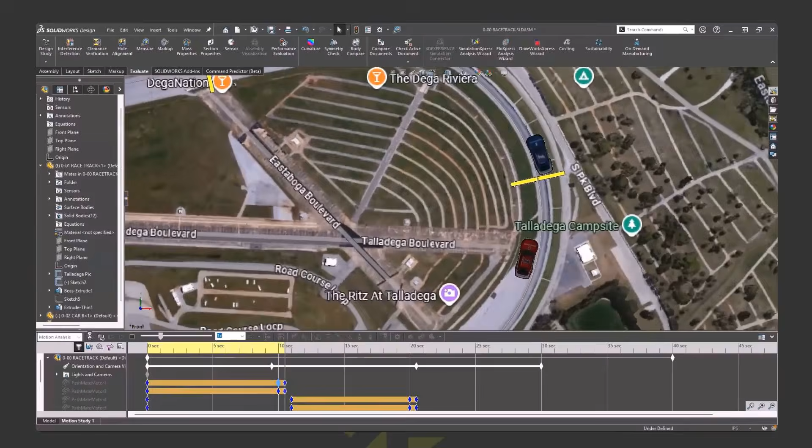So here's the little setup. We have, of course, SolidWorks. We're using Motion, and you do have to have SolidWorks Premium for the motion analysis part of this. What we did is we just ran two cars, and depending on what the results were set to, that will depend on whether the path motor is actually going to make the car go faster or slower.

All right, so in the agenda, we have different heats, six different heats. And each heat, I'll do a demo, Dave will do a demo, or vice versa. And then, of course, whoever voted for the most will decide who wins.

So on to heat 1. I'm going to start off with speed matters, and then David's going to go with speed matters with the fill pattern.

So, of course, you got to start off with a SolidWorks demo with a simple block. I'm going to go into the sketch, and in the sketch we're just going to do a pattern here. We'll select the entities, do a 19 by 5, give it some dimensions, and hit OK. Simple linear pattern in a sketch. We're just going to do a cut extrude through all. Hit OK, and we've got our pattern.

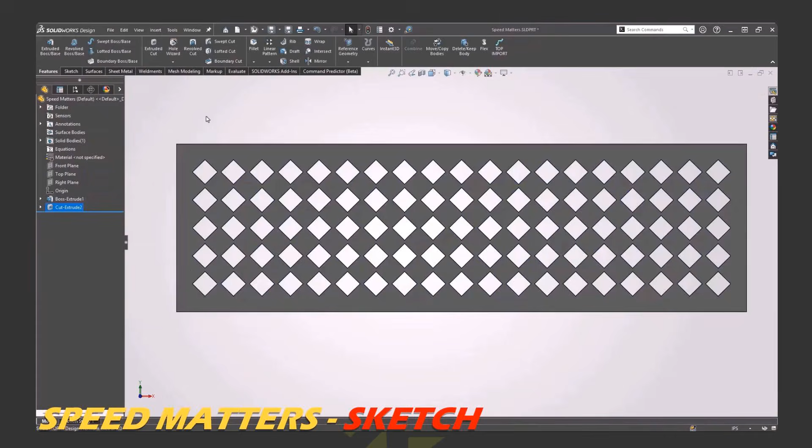So how do we find out how fast that actually is? We're going to go to the Evaluate tab, do Performance Evaluation, and we'll look at the total rebuild time. Right now we're here at 0.58.

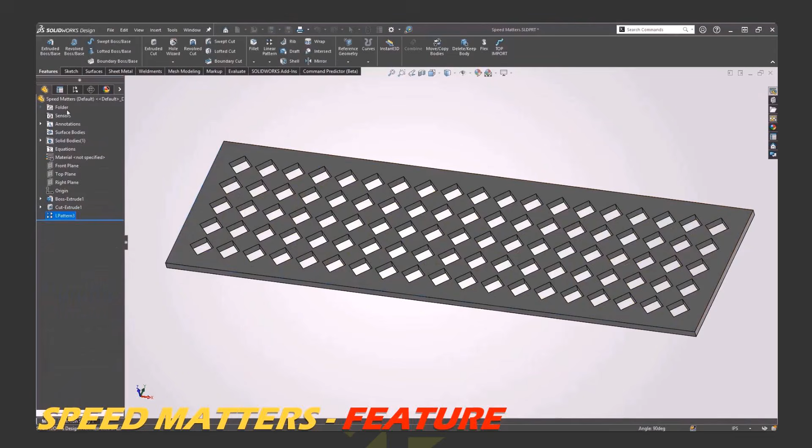All right, then we're going to do the exact same thing, just a little bit different way. I've got the cut as a feature, and then we're going to do this as a linear pattern. Again, we'll go to Performance Evaluation, and notice the rebuild time is 0.06. So our results: sketch linear pattern is 0.58 seconds, feature linear pattern is 0.06.

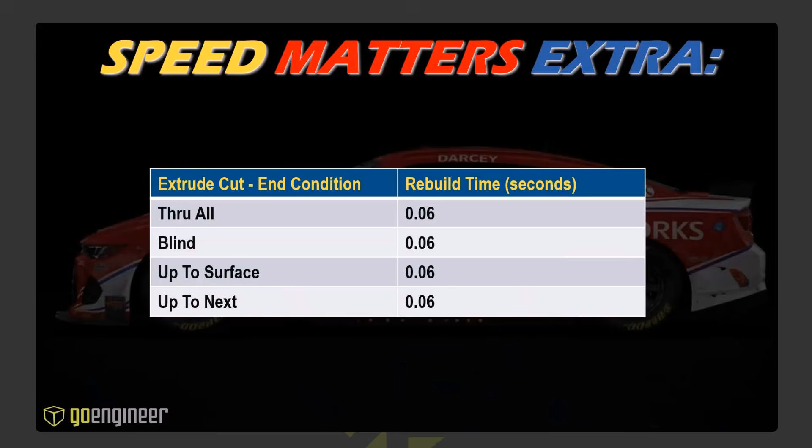So if you're going to do it, do feature linear pattern. It's much faster. So then I went down a little rabbit hole on whether blind, up to surface, up to next, or through all is faster. I wanted to just find out what's best. So we took a look at the evaluation results, and they all came out 0.06. So for the most part, it doesn't matter which way you do that. Pretty cool, but it's good to know.

All right, so then we decided to do something a little bit even harder. We're doing a circular pattern in this, and I'm going to do it in two different methods. Initially, I'm just going to do a cut extrude, and the cut is going to go up to surface. There's a little surface back underneath there.

And I do two different cuts, and then after the cut, I'm doing a circular pattern. So you can see it actually takes a little bit more time to do it. And if we go to performance evaluation, I did speed that up. It did take about 18 seconds for it to complete.

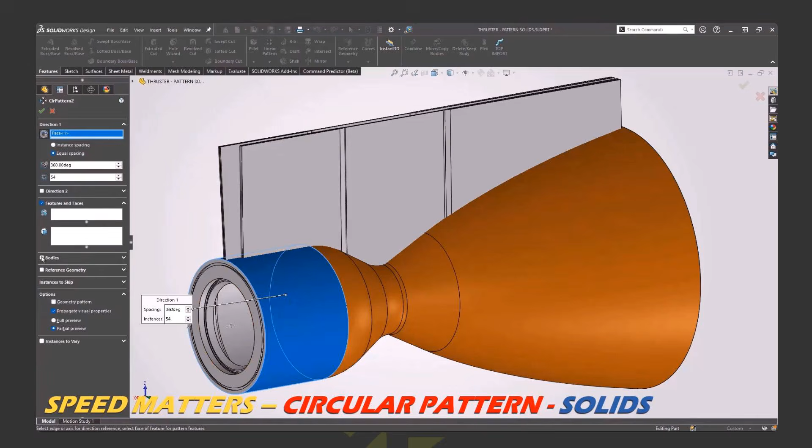So then we're going to do this a little bit different. Instead of doing a cut extrude, I'm extruding these solid bodies up to surface. So I've got my two solid bodies. And then again, doing a circular pattern, but in this case, doing circular pattern with the bodies. And I hit OK. And that circular pattern goes fast.

No resulting geometry to do, so it fills in just fine. All right, then we got to do a combine to cut and remove that material. And there we go. And then evaluate, performance evaluation. And you see this took 13.8 seconds.

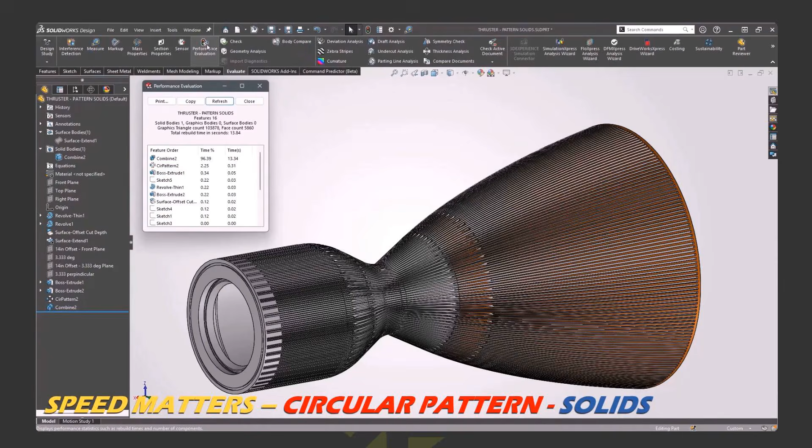So when we put them side by side, if I do a circular pattern, it's 18 seconds. If I do it with the solids, then it's 13.8. So it is faster typically. And in older releases, it's way more faster to do a solid pattern and then do a subtract.

All right, so fast parts equals fast assemblies. Feature patterns are typically faster than sketch patterns, and pattern bodies can be faster than patterning features. That's fast. Nice, right, Darcy.

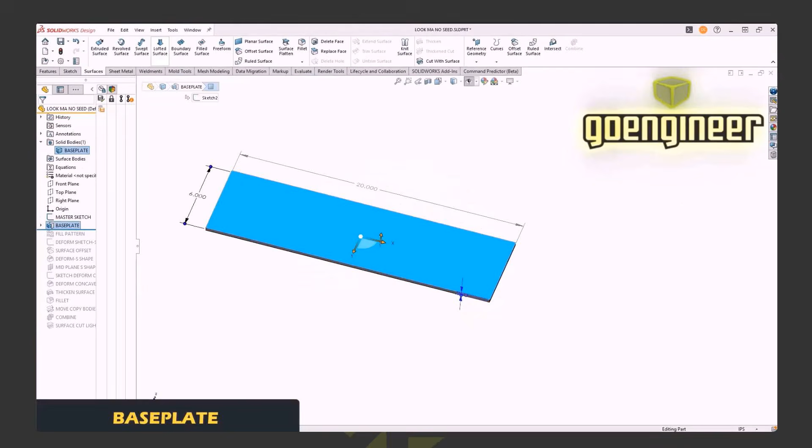There you go. All right, so what I'm going to show here is what we call a no seed pattern, and this turned into a light. So I wanted to start with the same size plate that Darcy had, and that's going to be sketch number 1. So keep that in the back pocket.

So I'm going to do a fill pattern. And when I do a fill pattern, notice over here on the left side, I've got all the properties. And all I've done so far is just select the boundary that I want to put the pattern. And what I'm going to do is I'm going to select my horizontal, my vertical spacing. I'm going to select an edge to start the pattern down. And I'm going to hit this button that's over on the left.

It's called Create Seed Cut. Now, when I do this, if you haven't used this before, it's pretty cool. I can pick 3 or 4 different shapes, and I can control it, especially if I have like a pentagon or octagon. I just set it. But let's match up to Darcy here. So 0.625, right? Looks exactly like Darcy's.

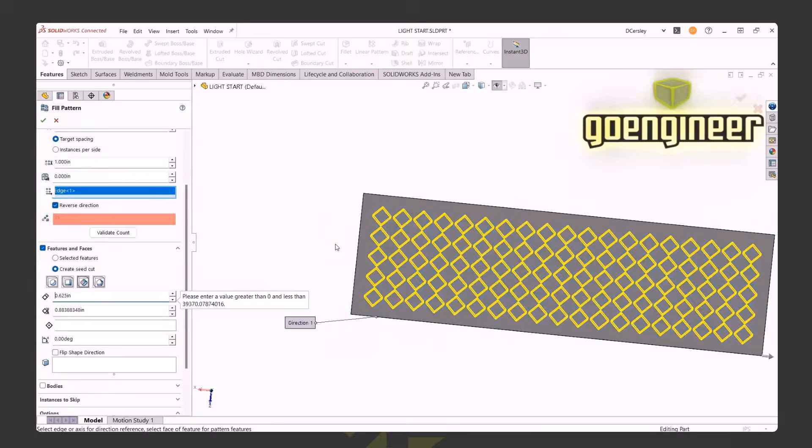So I say, OK, execute it, the command, D to confirm, and I go to performance evaluation. I can see that right now, Darcy was what? You were what? 0.06. 0.06, and I'm 0.17. So Darcy's a little faster.

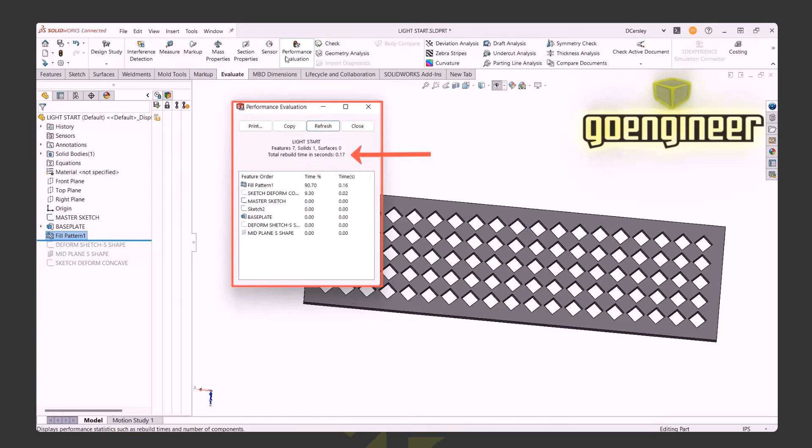But let's take a look and think about what happens not only when we make parts, but we have to edit parts. And that's where this may become a huge advantage for you. So let's take a look.

So speed matters, just like a NASCAR pit stop, right? So what if I come in here and I have to change that from a diamond to the hole? Look how quick I changed that. All I did was change the seed cut there in the fill pattern. Now, if I want to change it back, I can, okay?

Now, what about instances to skip? So when SolidWorks looked at this plate, it looked at the boundary and it created this pattern. I can turn all those instances off, whether I manually select them or I do a shift select. And if I had to do a hard chamfer here on this plate with a seed cut there, I'd be in agony city.

So here, I'm just going to do a right-click, clear, performance evaluation. And with a circle, notice my time is down to 0.08. So that made it a little bit faster.

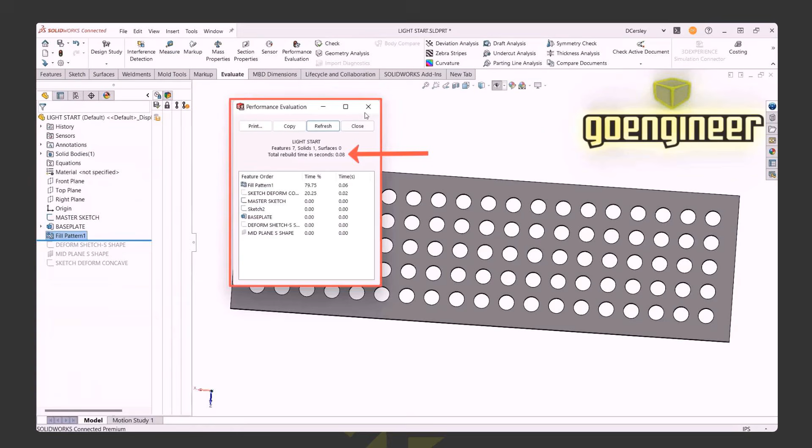And again, I'm a little bit faster here just for the ability to change things. So sometimes maybe you want to be a little slower, but go faster on change. Because unfortunately, we do have change.

So I got the plate, and this is where I kind of made a mistake, but I'm going to show you the deform tool, and we'll talk about why that was a mistake later. So I've got my second sketch here. So keep that in mind. So that was our second sketch. I'm going to do the deform tool.

But to do that, I'm going to create a copied surface. I'm going to offset 0. Okay? I'm going to come back. I'm going to hide the original body. And now I want to deform this surface.

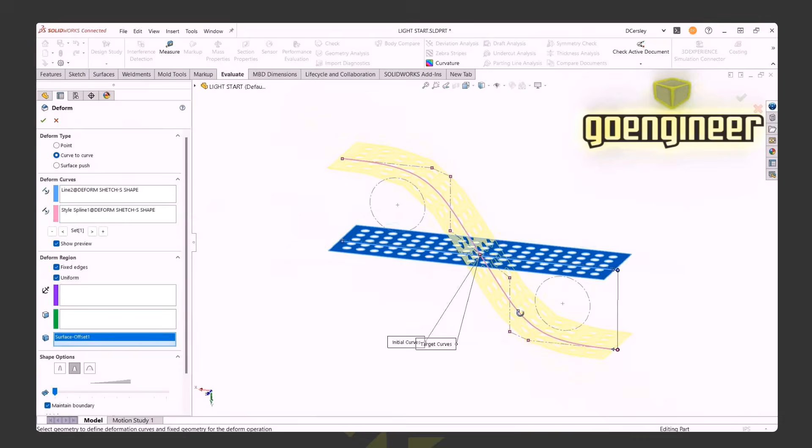So I'll hit the deform tool and use this line segment here and this one here to apply the curvature. I'm going to say uniform, then go pick my surface, and you can see the yellow preview. I was quickly able to keep the pattern. The holes look good, pretty happy here.

I'm going to deform it one more time, and this will be the third sketch we use to create this part. So I deformed it one more time with a third sketch. Pretty good. I'll turn off my sketches, and this part looks pretty good.

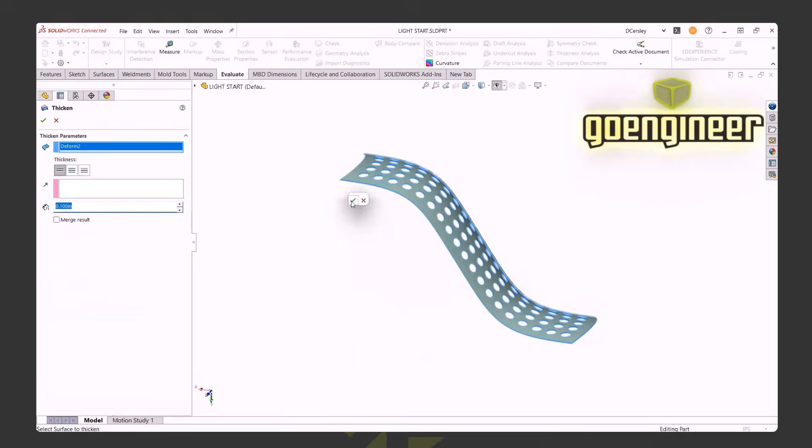Now to turn it into a solid body, all I had to do was use the surface thicken tool. So now I quickly went from just a surface into a thickened part. So I got this thing up.

Looks good. Okay, so here's where we run into a change. I wanted to change the shape back to the diamond, right? So watch what happens here. I just simply changed it, and oh man, like Cal Naughton Jr. said, or Ricky Bobby, help me Oprah Winfrey. So I had to make a quick change.

So I'm going to pick on the face. When I go back to the original body and pick that face, guess what? It's now updated not only the original body, but the curved body we deformed earlier. So I'm moving pretty fast here.

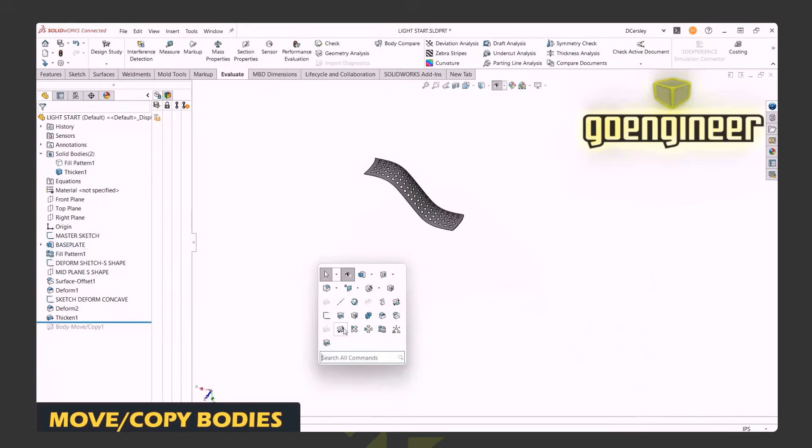So now what I want to do is one more type of pattern to complete this light. So there's my part, and I'm going to do a move copy body to create the pattern. I'm going to say 7 instances, and when I picked on rotate, something interesting happened. I said 45 degrees, 7 instances.

I had to go back and recheck the copy box. When I do, there's my cup. Looks like something out of Game of Thrones, right? But here, all I'm going to do now is do a cut with surface. I'm going to cut half of it away, and there's my light.

So when we talk about going fast, we used our fill pattern. The other thing is we didn't spend a lot of time on sketches—there were 3 sketches to create this part. Some of the benefits to you here are I didn't have to use sketches when I did this fill pattern. I put a little asterisk there because we're going to show you a way, if you have a custom profile, how to use that later, okay?

And I can quickly change the pattern. Now, the mistake I made on mine was I did the offset surface and then deformed it and then thickened it. I could have just deformed the body—that would have been the better way to do it. And I have full instance visibility for adjustments. So those are the benefits for you there.

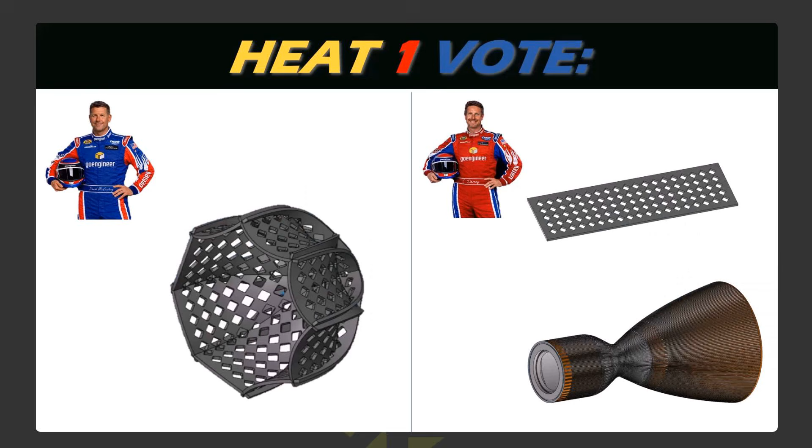All right, so then at 3D Experience World, we did a Heat 1 vote. And here was the results from that first one vote.

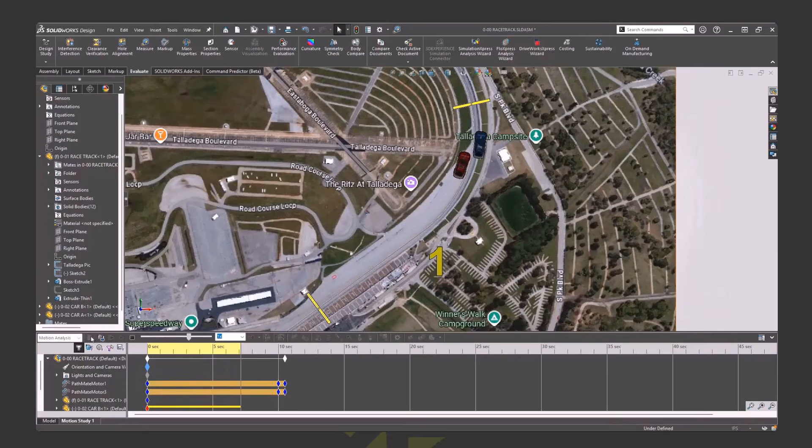All right, so what we have to do is just edit that pathmate motor. So we'll put the dimensions in, and then we're just going to hit the little calculate button. Let's pan in just a little bit. Let me reset that replace key. There we go. Now we hit calculate, and it looks like blue wins. Woohoo! All right, moving on.

All right, let's move on to heat number 2. Darcy and Dave—curve driven, sketch driven—and then Dave's going to do composite curve.

So on curve driven, there's a cool offset option on the surface. So I'm just going to use that tool, and you can see it makes that whole curve there on the surface. But I need to position my hole.

So I'm just going to go ahead and draw in a line in that 3D sketch, make that construction. Then we'll go right into Hole Wizard. The sneaky part about this is I'm just using a 3D sketch and position that on the surface first and then move it to where the location is. That way it'll always stay normal to that surface.

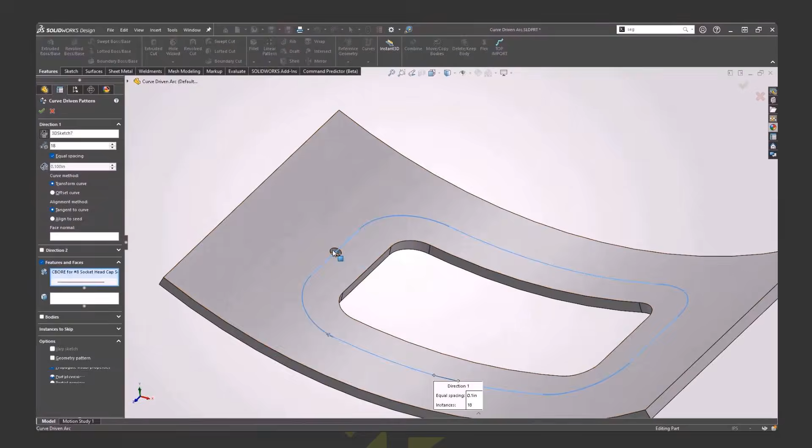So then we're going to go into curve driven. We'll just select on the 3D sketch—we can make more or less in there. Looks cool. Then make sure you do the face normal and select on the face, that way all the hole locations are going to be normal to that face. Turn off our 3D sketch. Then we'll go into kind of a section view mode so we can actually see that all the holes are normal, and that looks pretty cool.

Another one of my favorites is a sketch-driven pattern. I like this because it's very simple. We just put some points out there in a 2D sketch, then go right into the pattern. We'll do sketch-driven pattern, using that same sketch with those 3 holes. We'll pick on the boss and that hole, hit OK, and there we've got them done.

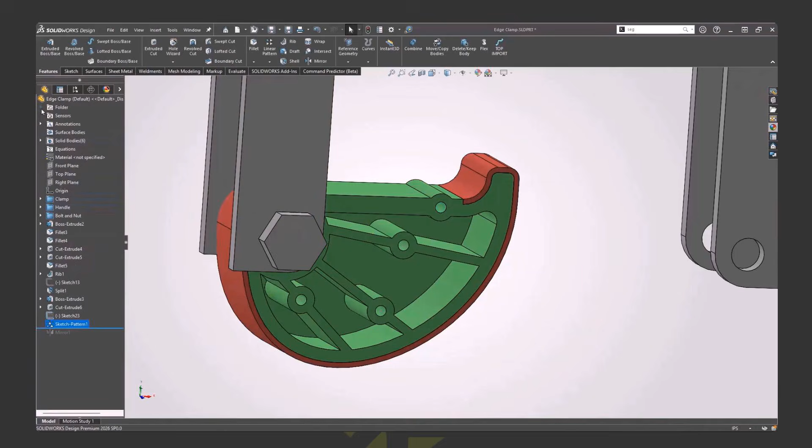So this part goes out to you woodworking peeps out there. That's a little wood clamp. It's kind of cool.

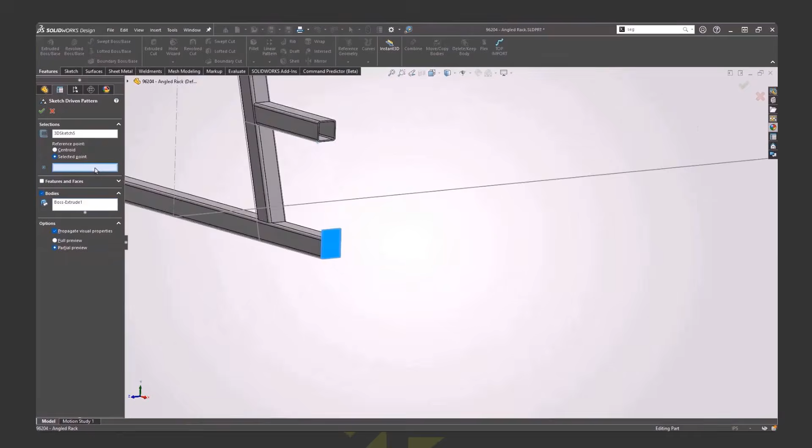Something else I found out is that the sketch-driven pattern doesn't have to be a 2D sketch. So I'm going to start a 3D sketch, and in here I'm just going to select on 3 points. They can be in different X, Y, and Z locations. Then after I have that sketch with the points, we can do sketch-driven pattern again, using that 3D sketch. In this case, I'm going to pattern bodies. The only sneaky thing is you usually have to select the reference point you want to go about. So now you can see all those little plates are in there.

Looks good. Then we just do a simple pattern to finish off one side, and of course mirror it to the back side, and we're done. So pretty quick, fast ways to create your patterns.

That is neat, cool. So what are the benefits? You can pattern normal to curved surfaces, easily copy from point locations, and you can also utilize a 3D sketch for your point locations on the sketch-driven pattern.

I'm going to show you guys this one, called curve-driven pattern. We're going to focus on creating the green piece, and I've got a multi-body part here. This was a jewelry box I made for my daughter, who said, Dad, I need a jewelry box. I thought, oh, this will be easy, but then I ran into problems and thought, ah, crap, let's see how this worked. So I'm going to show you both the errors and how I fixed it.

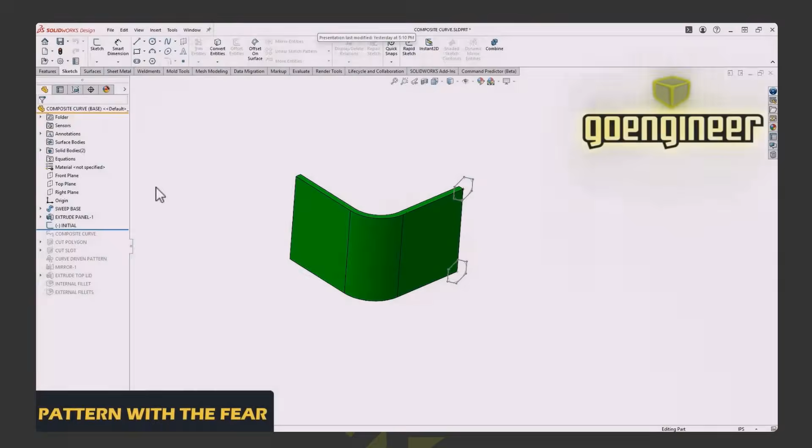I started out with that middle body and just did a cut. Key point here: make sure you do through all. Because it's a multi-body, I just selected the body I had open. So you do not want to do up to surface — that will not work when we try to go around the corner.

So I thought, well, I'll just do curve-driven pattern. I'll go pick that feature I just did, the cut, hit the green check, and guess what — it didn't work. It only went around part of the way because it only used that one line segment.

All right, so option 1 failed. Let's try option 2. I thought, well, I'll do what Darcy just did — I'll make a 3D sketch. I came in here, did a sketch, picked those 3 line edges right there, converted them, and I was like, I'm off to the races. This will be great, this will be easy.

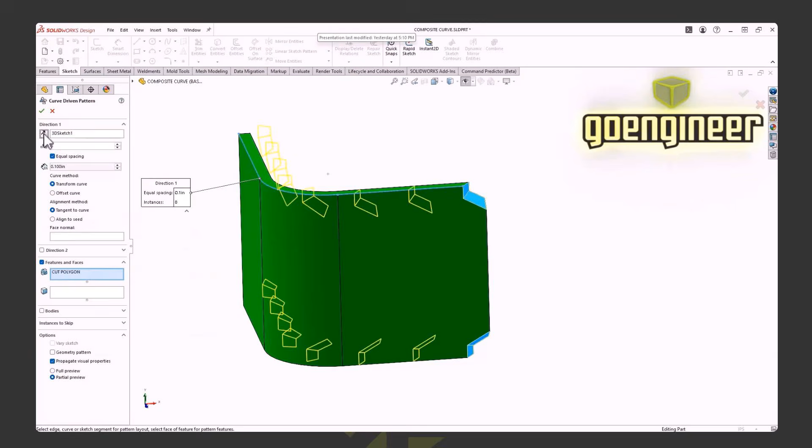A neat little trick: if I hold both the cut and the 3D sketch down when I pick on curve-driven pattern, everything is populated correctly. But look what happened again — we got a serious problem, it didn't follow that path. I tried clicking on every button over there to try and make it work. Like most of us, we just click on buttons, and sometimes it works, sometimes it doesn't. In this case, it didn't.

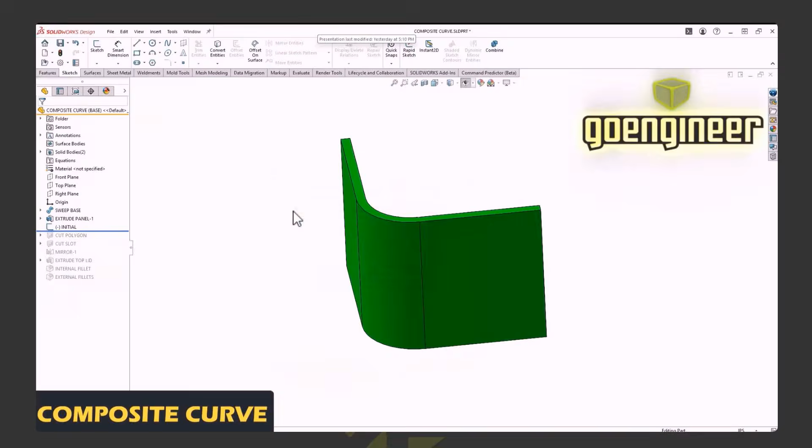So what would work? What I did here was try a composite curve. I used a composite curve and grabbed those same 3 line segments I did with the 3D sketch, but guess what — the composite curve is going to look at it now as one single line segment.

So when I do my curve-driven pattern, I'll go up, grab my composite curve — notice it went all the way around the corner this time. I can set the direction arrow right there. Cool, looks good. I'll go grab my cut polygon and hit the green check, and guess what — it patterned all the way around the corner.

So now all I had to do was add another cut. I went over to the feature tree, reorganized it, added an additional cut, and had to add that back to my original pattern.

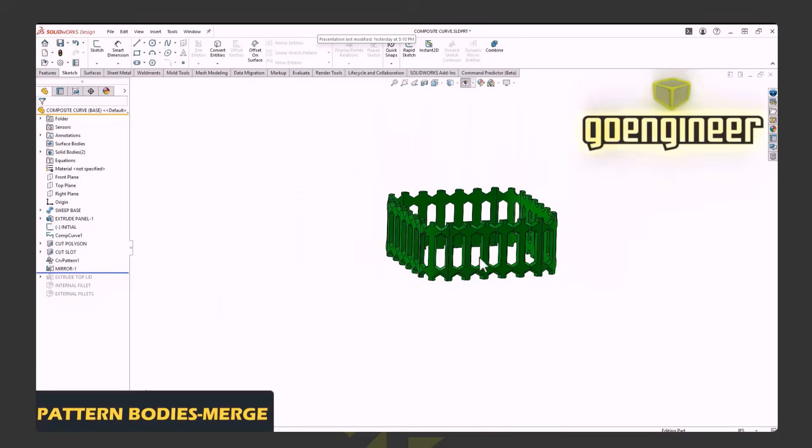And guess what? There's that body. Now to make this square part, all I did was a mirror, and I checked the merge entities box. So once I did that, all I had to do was come back in here and add a few fillets.

I started out trying one thing, that didn't work. Tried a 3D sketch, that didn't work either. And it was the composite curve that allowed me to make that go around the corner.

So some of the features and benefits to you, the end user, is I can get a pattern to go around a corner, which is really cool, and it's symmetrical. It's great if I'm doing multi-body part modeling, like this little jewelry box, and it made it easy when I went ahead and 3D printed the part. So pretty good, hope you guys saw something there.

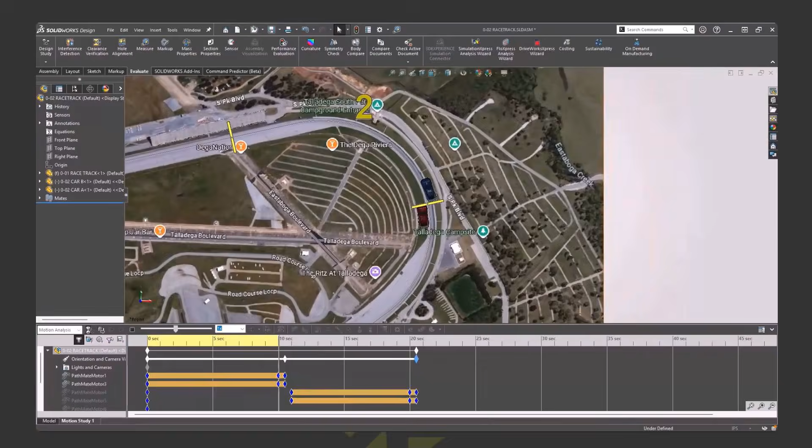So here's where we did the second round of voting. It was Darcy versus Dave, and everybody blew on the kazoos, and Darcy went ahead and updated the race information. We'll make our little changes here, add this for heat number 2, reassign where the orientation is, and calculate. So there we go. Dave started winning at the beginning, and we pretty much tied, so I caught back up on heat number 2. Well, it's going to be a tight race today. I feel the need for speed.

In this one, I'm going to show you guys how to vary your pattern using the sketch, okay? And then Darcy's going to get into variable pattern as well. So let's take a look.

So this is a part here Darcy gave me. I think a coworker had done it, but let me back you into what I did here. I made a solid body with some lofts, cut it in half, did an offset surface, and I'm going to use that surface to extrude up to.

I then did a sketch on the midplane and projected it. I did a split line, so now I've got 2 regions. I want to create a cavity from that first region, so I did a surface cut. Then when I cut it, I went ahead and filleted the corners. So that's all I did to create that cavity.

Now here, all I'm doing is an offset sketch, and I'm going to offset it 1 millimeter, all right? So real quick, real easy. Here's the key for us.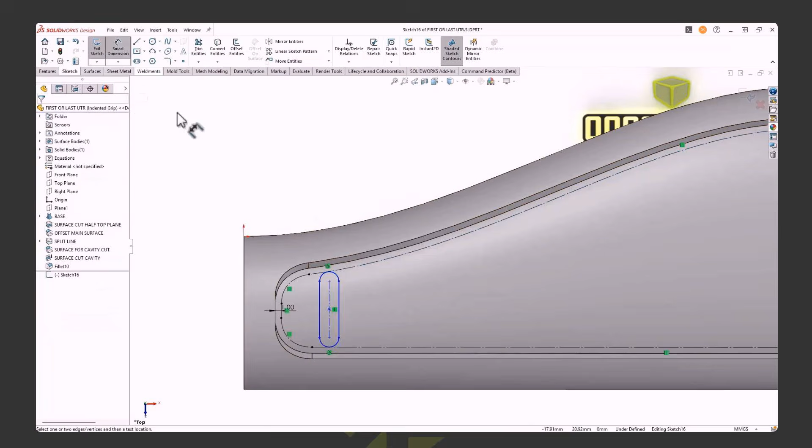I'm going to go ahead and put this little slot in here. The tangent relationships are what's going to be key to us here. I'm also going to set this dimension here to 8, and I'm going to use this to set the direction. Now I need to fully define this guy, so I'm going to go ahead and put a radius on it. And notice that I've got a fully defined sketch, okay?

And what I want is this slot to go, in this case, left to right and follow the orientation of that offset sketch. In order to do that, I needed that tangent relationship in there. So let's see how that's going to work for you.

The first thing I had to do was create a solid feature in order to pattern. So I just did a feature and said extrude up to surface, in that original surface. So again, my grip is maintaining the shape of the original body.

So I'm going to do a linear pattern. I'm going to pick on that 8, and that's going to set the direction. On the left side, under options, check vary sketch, and that's the key here.

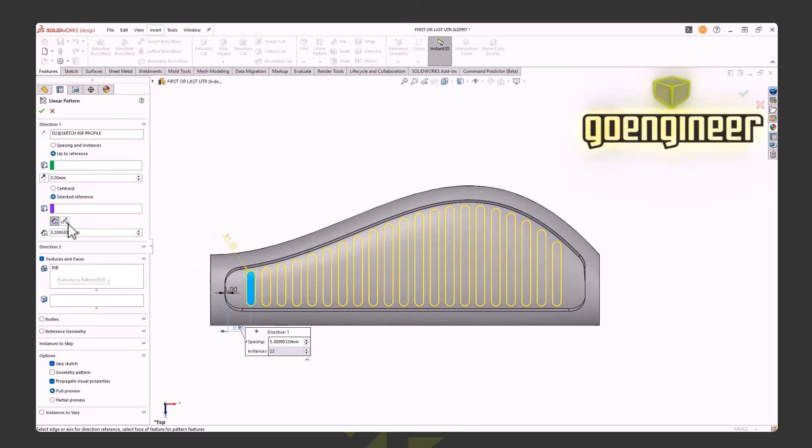I'm going to come up, set the number of instances, and do an up to vertex. I'm going to pick the vertex on the far end of my cavity, and say I want to stay off of that by 3 millimeters. And where am I going to pick this other little vertex? So I'm going to pick this other vertex. It's going to say from here to there, right? And I'm setting everything up.

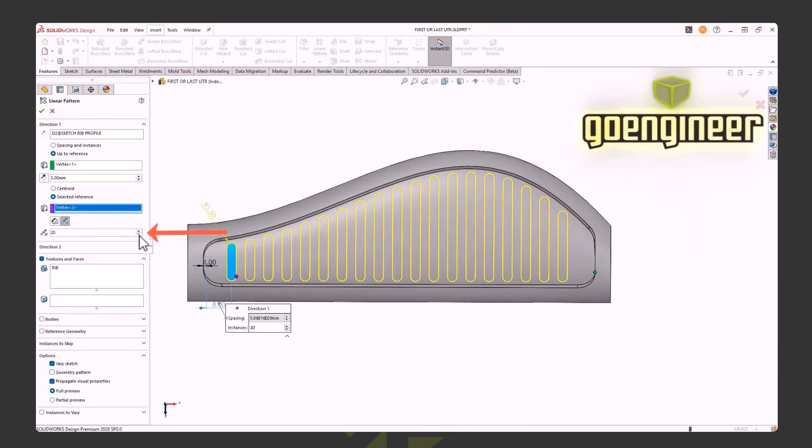Now, by doing instances like this, I can go up or down, and I can just quickly control the number of grips. This is great because I can set these, and overnight I can print 3 or 4 versions, right? So to finish this off, all I did was a cut through the middle. I filleted the ends of it, and it's all set to go.

The nice part about this is if I wanted to make 5 or 6 or 7 configurations, I could go home while the printers are running, and the next day come in and have folks test out this grip to see which one's the right fit. So hope that helps you.

The advantages and benefits here is this: I can update the patterns without editing multiple features, and that's where we're going fast. The more features you have to edit, the more likely you are to make mistakes, and you're also likely to end up with a bunch of ketchup and mustard in your feature tree. We don't want that. So this keeps your patterns up to date, reducing those rebuild errors.

I'm going to show you something kind of cool that I didn't know. Notice that when you do just a linear pattern, you can actually use lines, axes, dimensions, and cylindrical faces to set the orientation. So this is just a quick tip. I'm doing a linear pattern, but I can select the cylindrical face, and it's using the axis of the cylindrical face for the direction. I just put 5 of those in there real quick, just for the heck of it.

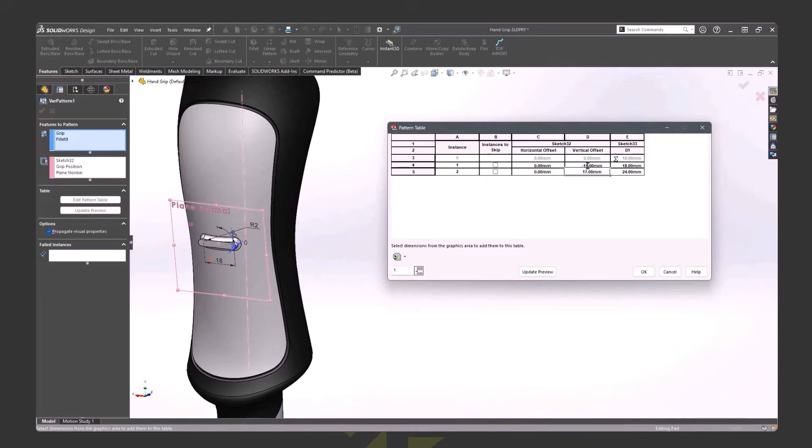Now let's get into the vary pattern. I've got 2 features sitting in there right now. The variable pattern basically uses a table. I'm going to add a new row and put in what the X and Y locations are. I'll make one go negative 15, and then up 17 millimeters. So I've got 3 of them in there now.

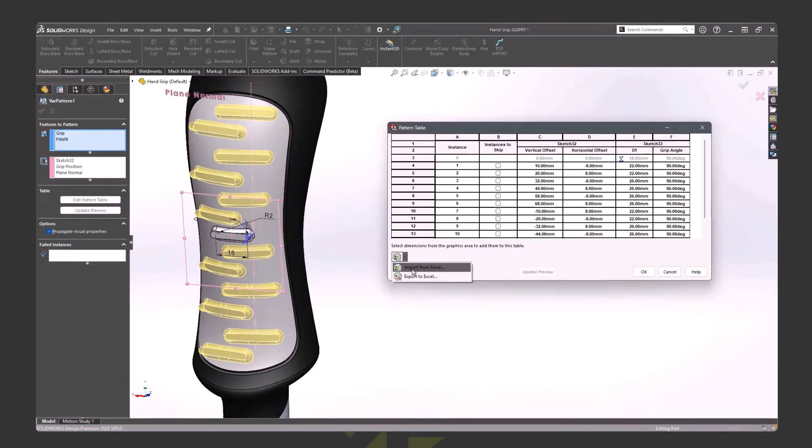But the cool thing is, for all you Excel spreadsheet lovers out there, we can actually import an Excel spreadsheet. So if you do all your equations in Excel, you can import the table. I actually did that and 3D printed it, but it didn't feel very comfortable, so I went back to Excel and made one that had a staggered pattern grip. Give that a second to load in, and we'll update that preview. Notice I'm not only varying the location, height, and width, but also the sketch dimensions, so it's a lot more versatile and fast.

All right, so that looks pretty cool, and that's a variable pattern. The benefits are, of course, it utilizes Excel spreadsheets, and it dynamically controls all pattern instances, all in just one tool.

And now, a public service announcement. We would like to talk to you about a subject that affects 2 out of every 1 engineers. Have you ever had to make a pattern and said, nope, not today, Satan, or just unplugged the laptop? It's called trypophobia, the fear of patterns. What do I do? Never fear, there is a cure, and it's called Patternol. Dave, that's amazing, are there any side effects? There is joy, happiness, your feature tree will be free of ketchup and mustard. Puppies will like you. I guess in some adverse cases, stomach pain and explosive diarrhea. But don't worry, you'll be okay. Sweet, I'm going to eat a mini right now. Cool, this will have you seeing patterns in no time.

How many of you are using smart fasteners? Chime in on the chat, but the advantage to using smart fasteners is the ability for us to be consistent, not only as individuals, but as a team. So how do we do it? I'm in an assembly, I'm going to say smart fasteners, and I'm going to quickly hit add once I pick this face. You'll notice that when I do that, I can add top stack or bottom stack components, with the bottom stack being on the back side.

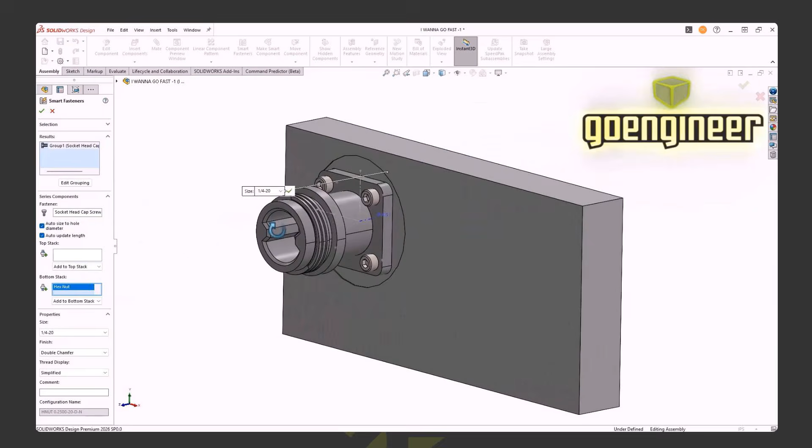So if I pick bottom stack, I can come over here and pick a washer. Notice as I pick these items, they appear right on the back. The good news is when I go to do a bill of material, all these will be accurate. So now I've got my washer and I put that on the front. That's kind of the first step.

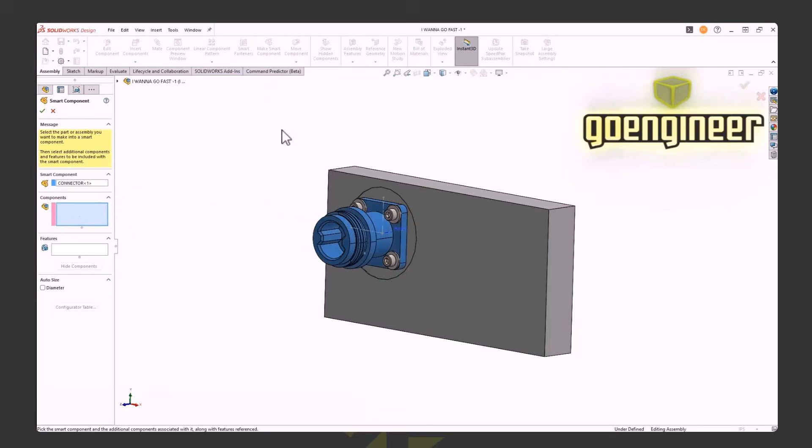I've added my hardware. So what's the next step? The next step is I'm going to make a smart component at the assembly level. My smart component is this connector. The components are going to be all the screws, nuts, bolts, washers, whatever I want to go with it. Notice that they turn a magenta color. They're automatically populated.

Now the features, I want this advanced hole that I've got here and this hole pattern. In this case, it did make me select the other hole patterns, which was weird, but I would have thought it would have grabbed all of them. But over at your component level, now when I go to the connector, look what I've got on the left side. All those components are with it - the advanced hole, the screws, nuts, bolts, everything.

So back here at the assembly level, let's implement this change. Here's my smart components, and I'm going to insert it. Now you can do this a myriad of ways. I just did a control left mouse drag and hit the green check. Now you'll notice that I've got a little lightning bolt here.

If I pick on the lightning bolt, SolidWorks says, hey Dave, what's the initial face? What's the ending face for my cuts? Because I've got those advanced hole cuts that I want to bring over and the hole pattern. So when I hit the green check and rotate this around, guess what - there's all the hardware. I can see that the hole came. But what about my hole pattern?

So if I come in here and hit Shift Tab or Tab, I can hide a body, so I can see that the hole pattern came through. And if I hold Shift Tab and hover it over where I think a body would be, guess what - it reappears. So the advantage here is I was able to add a connector and 16 pieces of hardware in just a few seconds, and I can be super consistent, and so can the rest of our engineering team.

So I hope you find that useful.

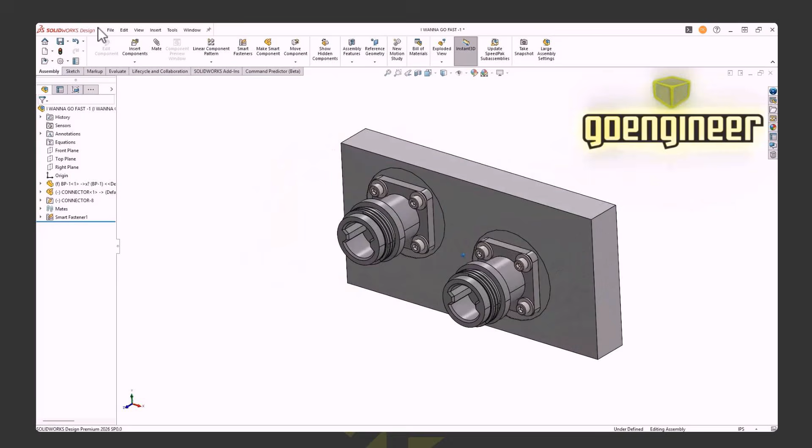The benefits here again: faster assembly creation. You saw how quick it was. My BOM is going to be up to date. I've got reduced errors and reworks, and can make this with configurable designs.

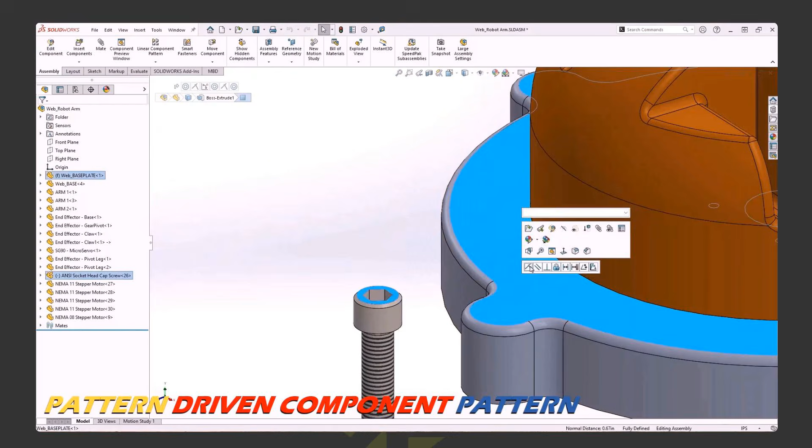All right, so I'm going to do pattern-driven component patterns. I like the smart components, so I'm going to go the same way that Dave did. I'm going to do a coincident mate real quick, just plop that guy inside there, and then hit the little lightning bolt to insert the smart feature. In this case, it's creating the hole for that bolt. So all I have to do is select on that top face, hit OK, and now I've got my pattern.

Cool thing is, if you drag this guy around and just hit the update button, then it's got to create that hole in that new location. So just to put it in the right location, let's put a concentric mate on there. There we go, and it's up to date.

But now I want the hole in all the different ears. So let's open up the part in its own window. You can see the smart feature is in the feature tree. So I'm going to drag it up above the circular pattern. We'll edit the pattern and just add that hole to the pattern for the ears. So now it's in all 4 of them.

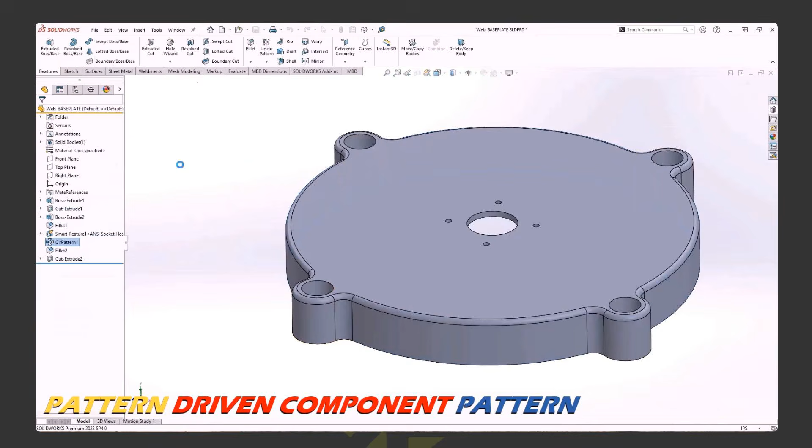That's great. Let's save that. But now I only have the bolt in the first one. So we're going to do a pattern-driven component pattern, which means that the assembly is going to link to the part. So I just need to select on that ear, and if there's 4 ears, then there's 4 parts. And the cool thing is I can change it.

So I'll just double click on that dimension. We'll see what 5 looks like and rebuild - so I got 5 ears. We'll do 6. That's cool. I'm going to bring it back down to 4. We just want to make sure that everything updates right. And there we go. Save it and close it.

So the benefits here: the assembly is driven by the part pattern. It's faster updates and rebuilds, utilizes smart features, and the bill of material is always up to date.

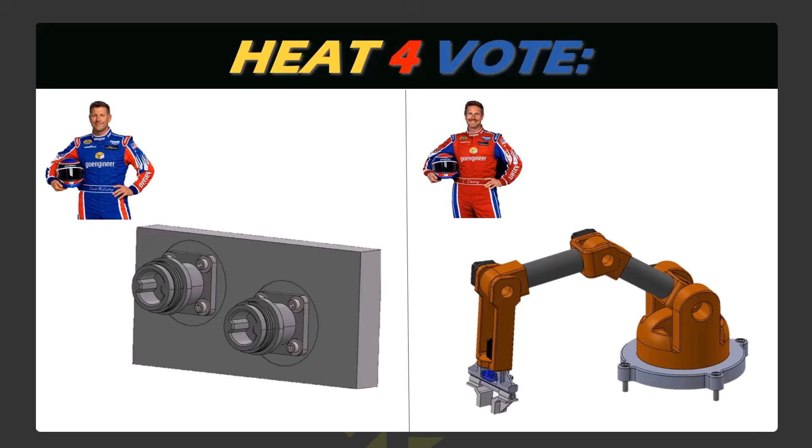So we have to add in the 4th heat there. Let's go change some of these dimensions. And we'll just recalculate. And here we go.

Round heat 1. 2, we tied. 3, Dave started taking the lead. Oh, yeah. And 4, oh, I'm coming around. Oh, man, coming around the end.

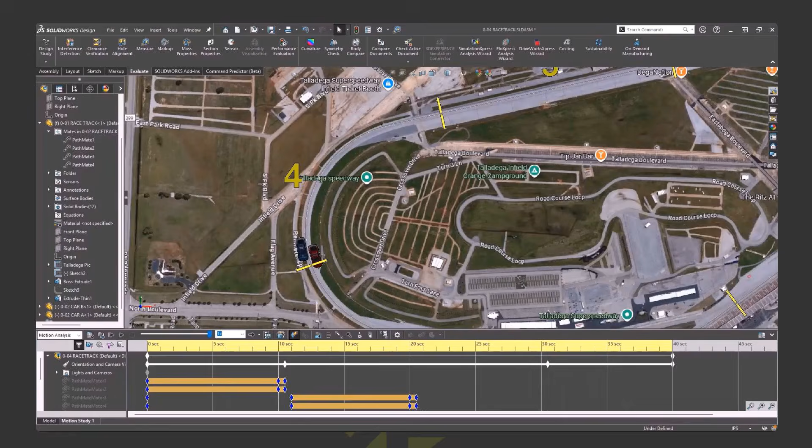Who's doing the voting in this thing? Who in the world? I disagree. I disagree. All right, moving on to heat number 5.

Go for it. All right, so we're going to go back to that fill pattern. We're going to use a custom feature, and then Darcy's going to show you some awesome stuff with 3D textures. So we're going to make this grip right here, okay?

We want to make a prototype of it, but what we're going to do is focus on that green area. I've already got that pocket, and I've got this surface here. Now I've offset that pocket surface by 0, copied the surface, basically. So what I need to do is a couple things.

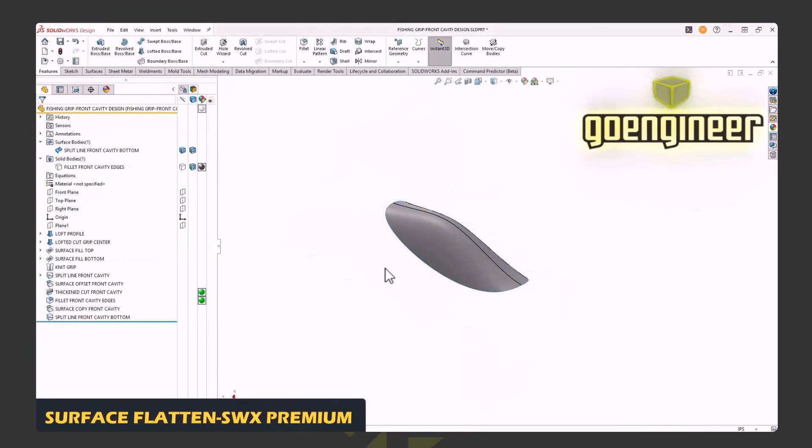I've made my part symmetrical, and I'm going to have to flatten it. So the first thing I'm going to do is use an intersection split line. I'm going to grab the plane that's going through the middle of the surface, and notice that yellow line? That's going to be my line here that I'm going to flatten from. I needed a point of reference to flatten from, so I created that with that line.

So when I go to surface flatten, which is in SolidWorks Premium only, notice anywhere that I picked on that original yellow line, it's now a pink line in this image here, wherever I pick, SolidWorks flattens the surface from. So I can come back in here and hide that original surface now, okay?

So let's do that. Let's come in here. We'll use Shift Tab and hide that surface. I'm going to come in and thicken the body, and I'm going to thicken it the same as my cavity depth, the 0.5, and I'll hit the green check and make sure merge result is unchecked.

Now I'm going to advance this just a little bit. All I did was make a sketch with a cut in it. Now I've got a custom feature.

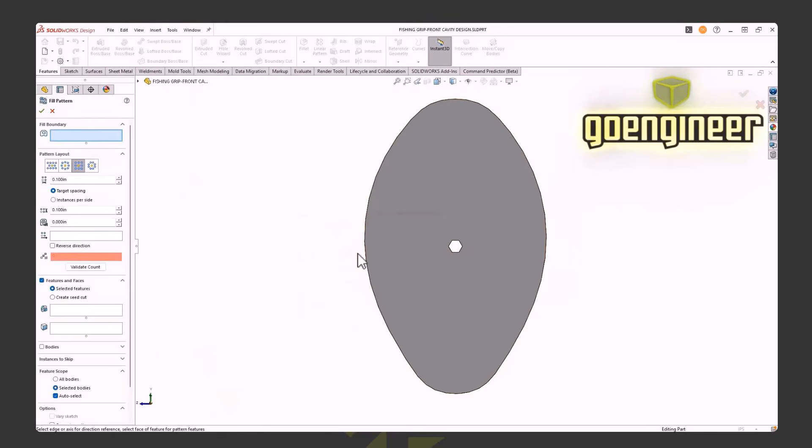I'm going to use fill pattern, and I'm going to set the options over here on the left side. Okay? And just like we did before, we set all our options. And over here this time, what's going to be different is what I want to pattern is this original cut. But I need this directional arrow here, or the direction for the pattern.

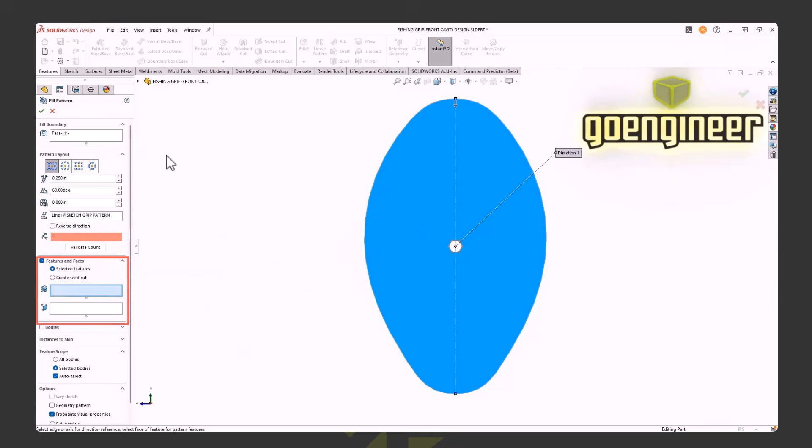Okay? So I'm going to zoom in. I'm going to pick on that cut that I just made. Okay? Great. And now I can see that it's going to pattern. I'll pick the surface, and the cool part is, notice over here on the left side, it gives me an instance or a validate count.

It tells me there's 103 instances of this in here. So now I can go back and adjust the spacing and get a different count for different grip prototype testing. So when I hit the green check, now all I have to do is the hard part.

And this is something I screw up every single time. I'll go to convert entities with a new sketch, and I'll say inner loops 1 by 1, and I'll pick the face. Where I fail is I always fail to hit that inner loop. If you don't, it just gives you the outer profile. But if you select it, guess what? It grabbed all those inner profiles.

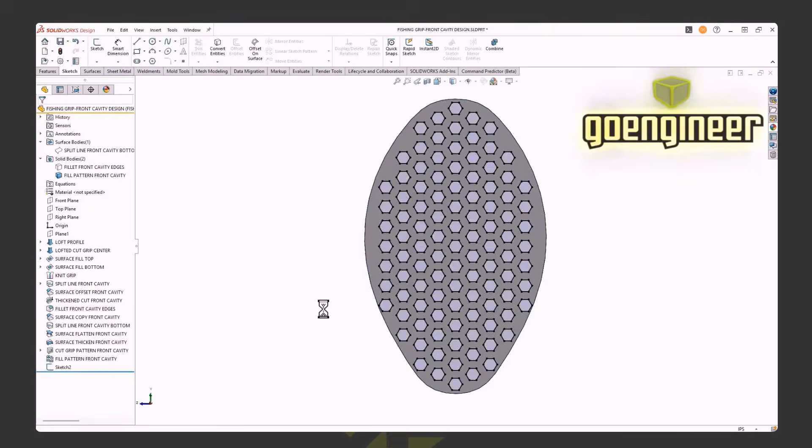So I'm going to turn that sketch off for a second, or that body off rather. Turn it off, and now I got to get that sketch onto the grip. So how are we going to do that?

And we're going to use a tool called the wrap feature. So what I want to do is come down here. I'm going to hit wrap. I'm going to come up here. I'm going to grab my sketch, and then I'm going to grab the body or the surface that I want to go up to.

Bonk. There it is, and I got a preview. And I'll set whether I want it embossed or debossed.

Down on the left side, I can set the accuracy of this. Just for speed of today, I'll go ahead and hit a low accuracy, and all I have to do is hit the green check and see how quickly I was able to get that on there.

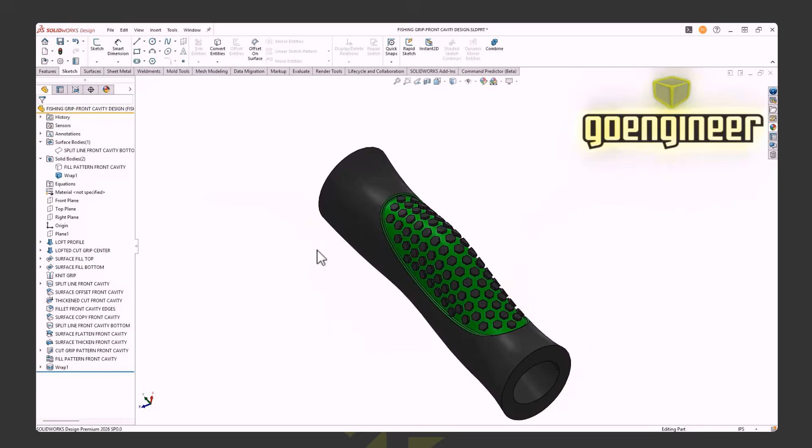The nice part is if I needed to create a bunch of prototypes of this, I could play around with the settings, print them overnight, come back the next day, and decide which one of those grips is best. So the benefits of using this is I can use custom feature profiles on that fill pattern, and it's great for prototyping and 3D printing. Again, I can just create a whole bunch of different versions, print them overnight, and test out the next day. And I did all that by utilizing the wrap feature.

What you got, Darcy? I got something cool.

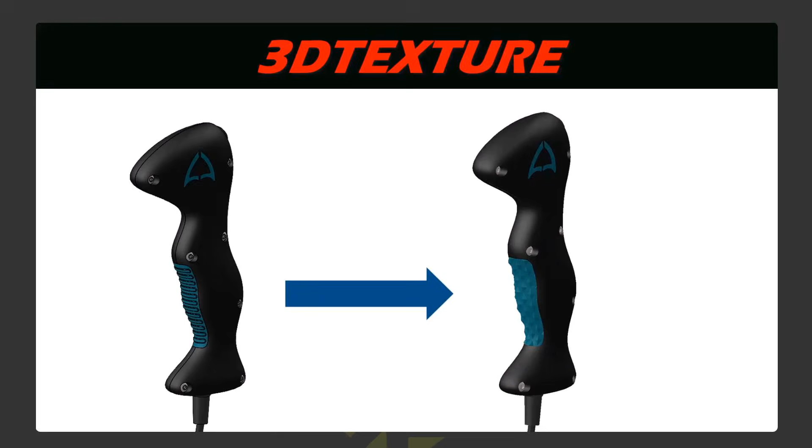All right, I'm going to do some 3D texture. I'm going to use my little handle grip here. Right now it's flat, so we're going to go through this step by step. The first thing we need to do, I'm going to put a knurl pattern on here.

In SolidWorks, if you go underneath here, we have some 3D textures that are automatically included. When I drag that on, make sure you apply it just to the face. Then it's always going to be a little bit weird, so you have to go in there and edit the appearance. On the mapping, I'm going to straighten that up. First, I'm going to tell it to map on the surface and not projection. Then we can scale it up and down.

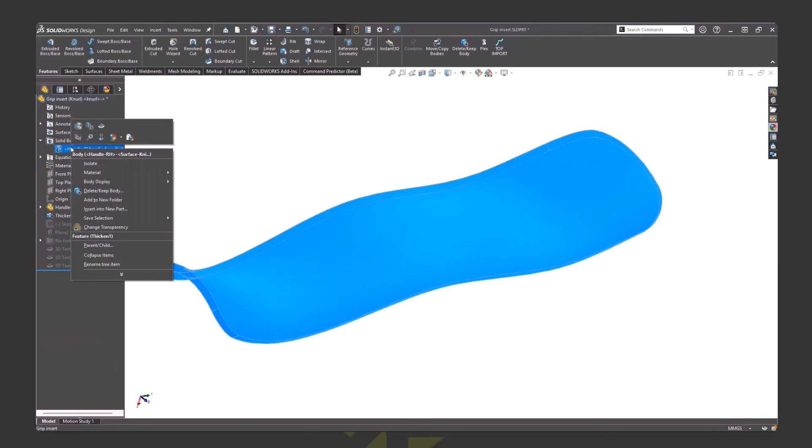The main thing here is the difference between the white and the dark. So when you're choosing a texture, make sure that you have something that has very high lights and very low darks. All right, then we just right click on the solid, go to 3D texture, check the box for that.

Then you can see the distance. We can make this really tall if we want. We can also change white up and black down, or vice versa. Then we can also change the element size. In this case, depending on what type of 3D printer you're printing on, will depend on what your texture needs to be.

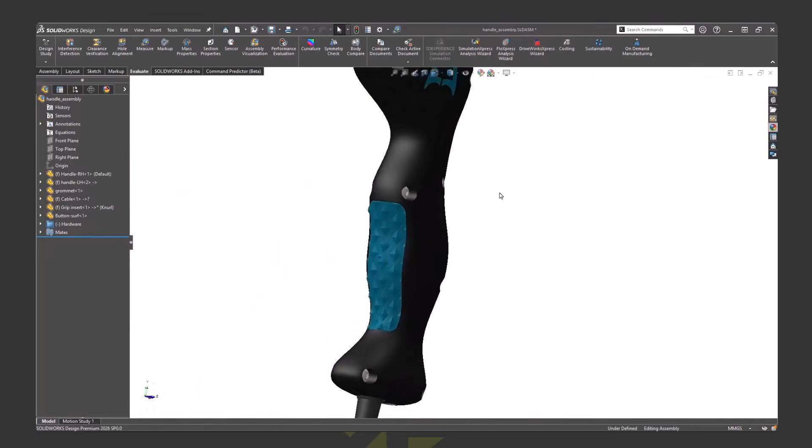So that looks pretty cool and pretty easy to create. We'll go ahead and make it that cyan color. We'll save that, change it to where we just see the faces on that, and that looks great. So pretty easy to create a pattern. You can pretty much make a pattern on anything with a JPEG, a black and white JPEG.

Here's some other things that I did instead of just the diamond pattern. You can also do dimples. You can also remove the dimples just by hitting that reverse option and hitting the OK checkbox. So what are the benefits? It's great for 3D printing, reduces the amount of features, and quickly utilizes complex patterns.

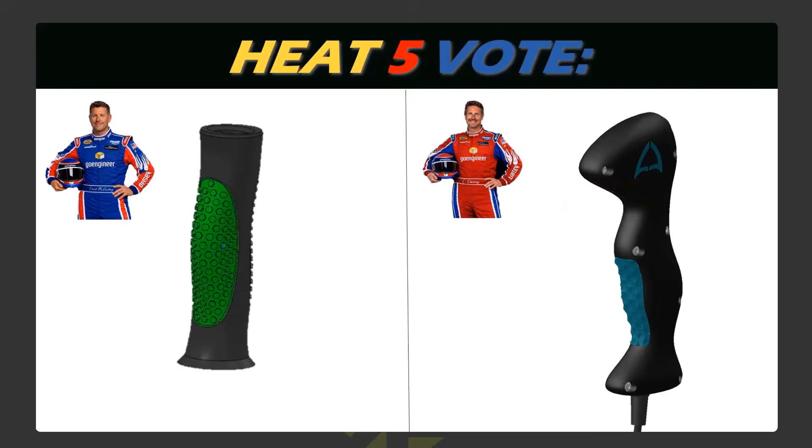All right, heat number 5. Let's vote. So let's see what the results came out for heat number 5.

Cool. Round the corner, round the corner. Down the back stretch. And then I was catching you on 4. Oh, and 5, looks like you're going to get a victory, Darcy. That's right. And you know what, Dave? Can I win all the time? It'd be great if I could win and be number 1. Number 1? You can't be number 1, Darcy, because if you're number 1 and I'm number 1, that makes 11. Oh yeah, okay. Well, you can win then.

All right, so heat number 6, we're going to do lattice and visual scripting. That's some pretty cool stuff. So let's get to it.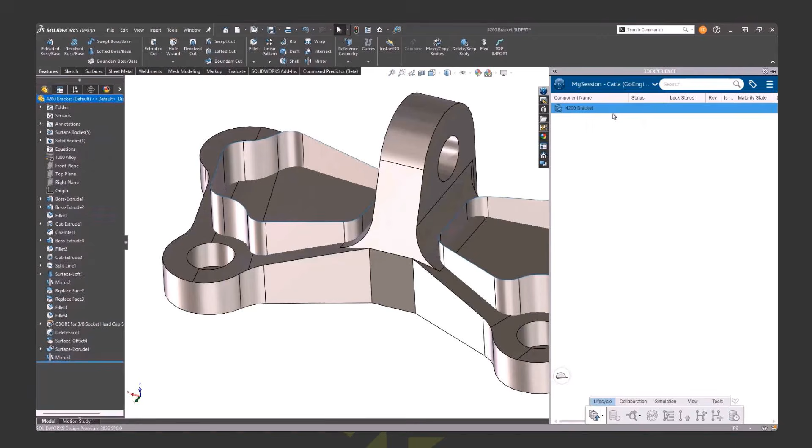So how do we do it? We, of course, get into SolidWorks. There's a couple different ways we could do it. I'm just going to do this with a surface and extrude that. Then I want it on the other side as well. I want to do 2 different patterns, so I'm just going to mirror it. And that's it. Then we take our SolidWorks part and we're going to save it up to the 3D Experience platform. I like to put it into my lattice bookmarks so that way I can find it easy.

And then once it's on the cloud, we just select the Lattice Design role, and that's going to automatically start up CATIA in the Lattice Design role. Then I can just drag and drop and open that thing up in Lattice Designer. All right, we'll maximize CATIA.

This is actually a SolidWorks part, so I can't make changes unless I do what's called an abstraction shape. In the abstraction shape, I can make extra little additions to the feature tree here. So we're going to copy that in there, and we're going to close up these surfaces. It's just a real simple way to make these things booleans. That's where the lattice is actually going to happen in here.

And then 5 quick, easy steps for Lattice Designer. What part body are we going to do it to? What are the different cavities? So here I'm just going to select these volume cavities - one on the right, and then we'll make another one on the left.

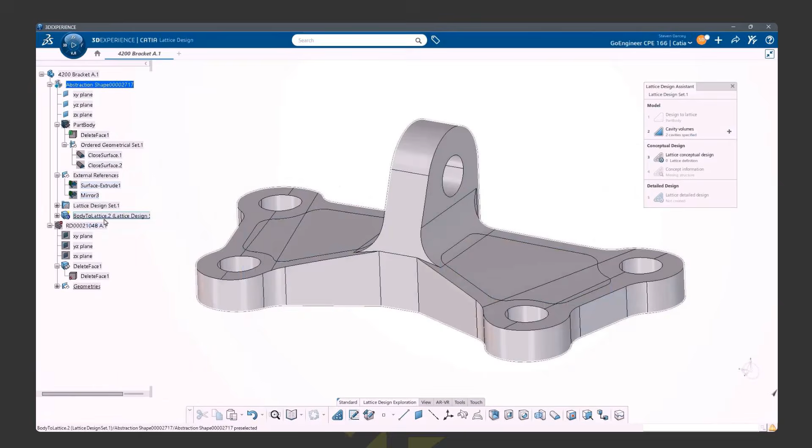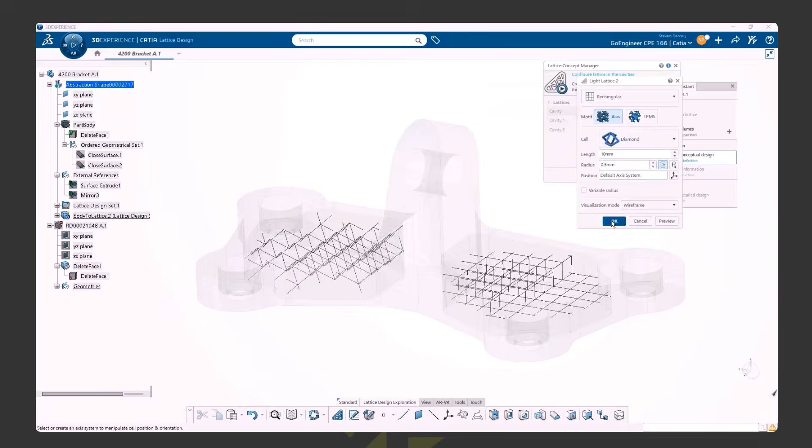So it's looking good. Now that I have those 2 in there, I need to tell it what am I going to do with each of those - am I going to do it with bars or TPMS? TPMS is surfaces. We have different options for the different cells, and this one I'm just going to use cubes. We'll go ahead and do the one on the left as diamonds. We have a lot of different options for the length and the radius, and you can also orient it in different directions as well. We'll say OK to that.

Concept information is just some options on how much filling is happening to it. And then step number 5 is just the decimation sag. Hit that and hit OK. So pretty quick and pretty easy.

This would be very difficult to actually model up, especially when it hits those side faces - you'd have to put all those fillets and stuff on there. So this is a really quick, easy way to make lattice designs. Now I went ahead and did an update to it just to make a really cool shape, and it's pretty fast. This took, I think, about 1.5 minutes to actually create that lattice structure.

How long would that take you in regular SolidWorks? It'd take you a really long time to make these models. I would have to hire somebody else to do it. Would not want to do it.

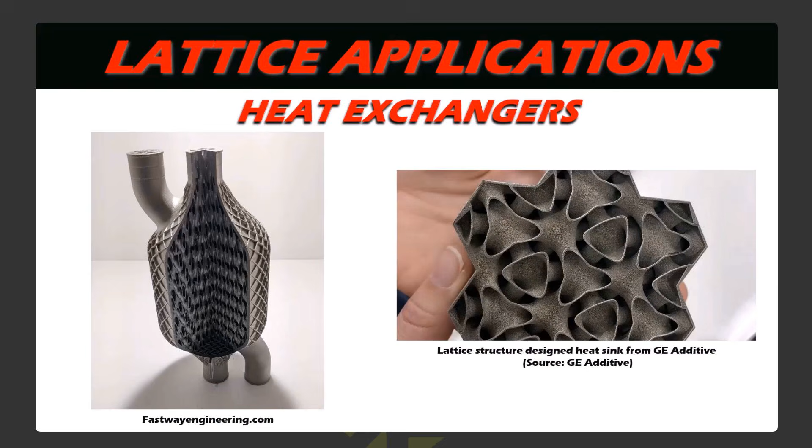So some other lattice applications - if we did surfaces, we could do some stuff for heat exchangers. You may actually be buying some sports applications that already have some lattice structures in them, and any medical applications - you're going to start seeing these in more and more stuff as well. So the benefits are, of course, create complex, lightweight bodies, reduce modeling times, 3D print manufacturing, and optimize design for strength to weight ratios.

All right, cool. Next, we're going to talk about visual scripting. And if you had to make this part in SolidWorks, well, in the words of Ricky Bobby, are you kidding me right now? For those seeing visual scripting for the first time, here's a little sneak peek.

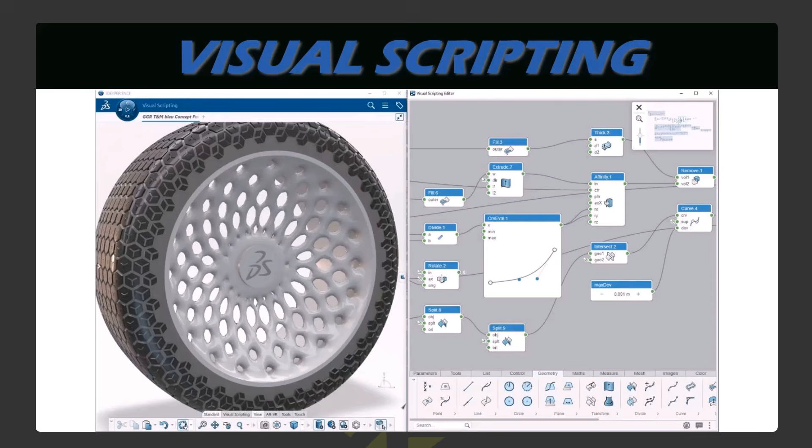But this is what visual scripting looked like. I've got the model over on the left side, and over on the right, you can see what we have on this gray screen - these are what we call the operators. So let's take a look at it.

So last year at 3D Experience World, we created this rocket, okay - our space exploration rocket. So what we want to do is get this into visual scripting from SolidWorks. We're going to pick and we're going to do some surface, right - either offset surface or copy the surface.

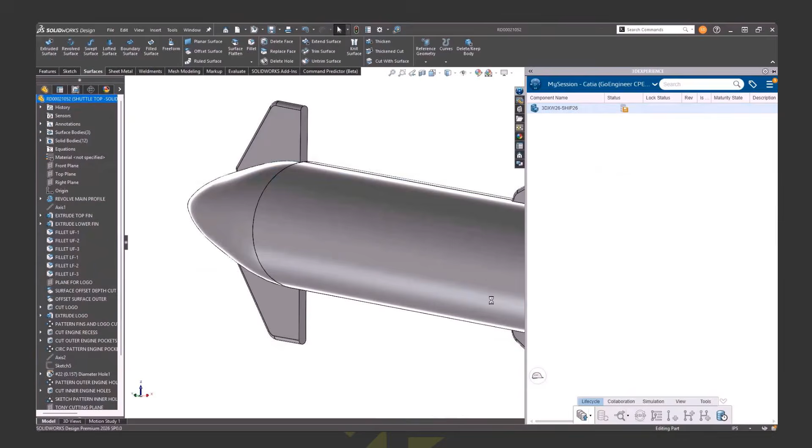Now I'm going to bring this up to the 3D Experience platform. So once I've got it, I'm going to save it into my bookmark so I know a nice, easy way to find my part, right? So it's in 3D Experience. I'm going to go over here to the left side, click on the compass, and open up the app, Visual Scripting. When I open up Visual Scripting, this is a CATIA-based role.

There's my rocket. Now what we want to do is start to get this guy in here, and play around with generating a really organic heat shield. So let's isolate this surface, and then let's start playing around with visual scripting.

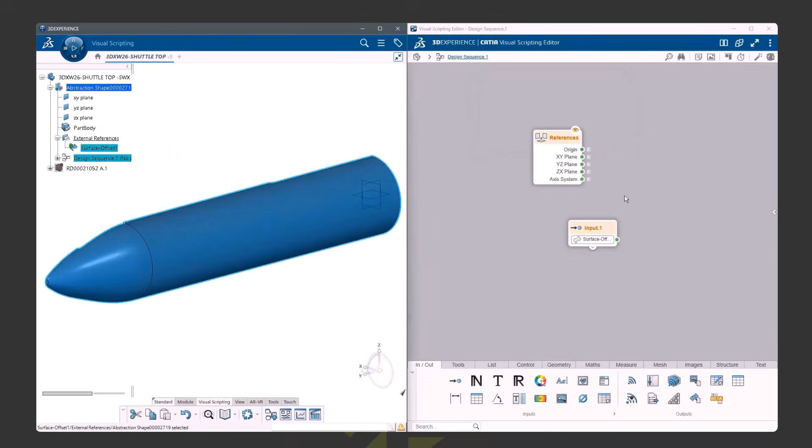Here's my surface. I'm going to go down here at the bottom and pick on visual scripting, say OK. Now over on the left, what we're used to when we do stuff in SolidWorks is a feature tree. Over on the right, what we're doing is visual scripting, and these are called operators. Think of the operators as just a feature in your SolidWorks feature tree. That's how I explain it to myself. Hopefully that helps you out.

Now what I want to do is start to divide this thing out. I want to create these subdivisional surfaces, and I'm going to use these points. Now I have all of these operators, and notice that I'm drawing a line between them, saying do this, then the next thing, then the next thing - just like in SolidWorks where features reference each other.

So what we're doing is Voronoi, creating boundary surfaces. If you watch over here on the left, as I create this script on the right using the operators, I can start to see that this surface is now being broken into smaller pieces.

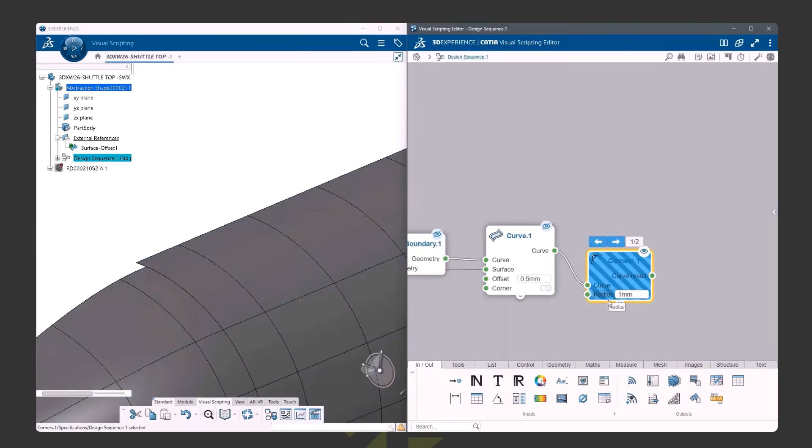So what do I want to do now? I want to put some fillets on these corners. So I'll set the corners - pretty good - and set the radius. Okay, great. Now the next thing I want to do is add another operator, and I want to go ahead and fill, and add these to get some volume to them. Let's go ahead and do this.

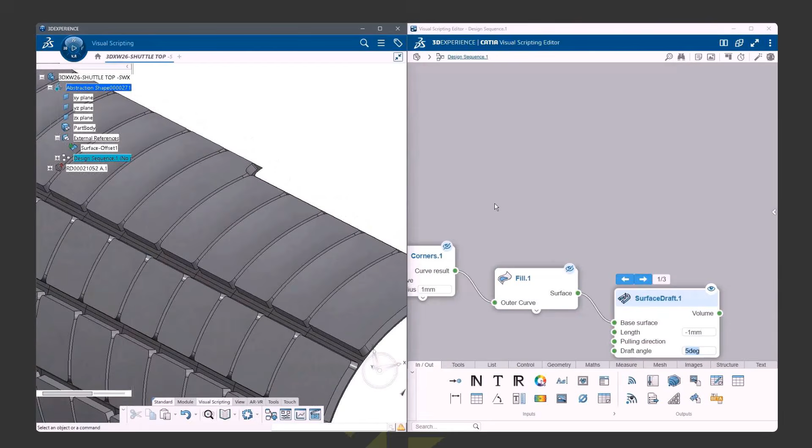If you've ever done this in surfacing, this would be a great addition to SolidWorks - to be able to add draft to a surface when we extrude it. But look how quickly, with just a couple operators, we were able to take that flat surface from SolidWorks, and with just a little bit of scripting, create this heat shield.

But we're not going to just leave this alone. We're going to try and take it to the next level. Now what I really want to do is get something that's less mechanical looking and something very organic looking. So let's start to tinker and see what happens here.

Here what I'm going to do is take one operator and reconnect it back to that pattern. So now when I go in and look, with just a couple simple operations, think about how crazy that surface would be to create in SolidWorks.

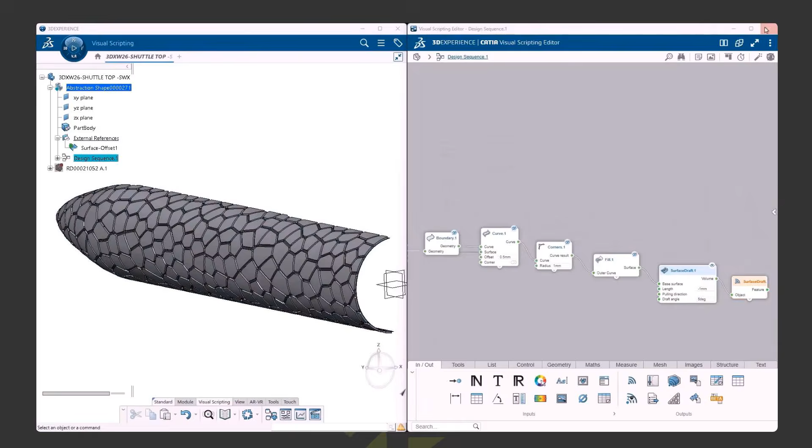And each one of those has some crazy patterns, some crazy shapes, and they have draft, and I've got nice spacing, and I can quickly control how that looks. And look at that surface - that's pretty awesome. So that's visual scripting if you haven't seen that before.

Again, be on the lookout for Mike's webinar here in a few weeks. Some use cases - folks in the automotive industry are using it. People who design buildings, things like that, are using it as well.

When we talk about visual scripting, the benefit here is I can automate complex geometry - you saw how quickly it was to create that. We use SolidWorks, CATIA, in the 3D experience workflows, and it worked seamlessly. What you saw there was no punches, no clever editing, just as it was. And I can capture and reuse engineering knowledge over and over again. Pretty nice way to do it.

All right, so the final heat - this is coming down to the last lap. So we had everybody vote with their kazoos, and let's see how this race turns out.

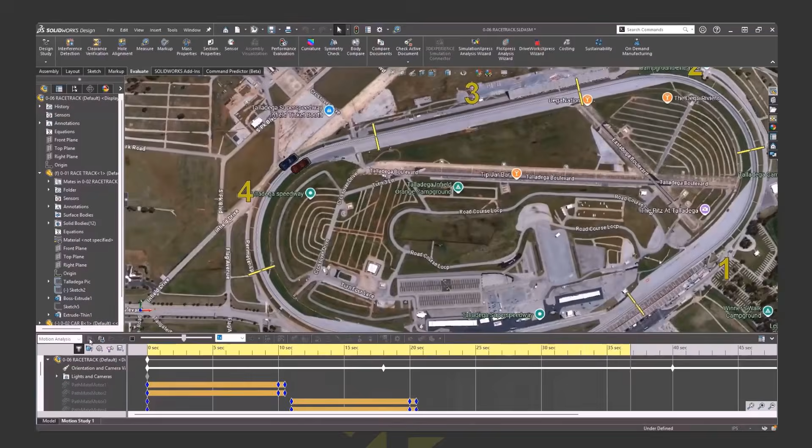So here we go. I think they kind of like the visual scripting a little bit better. Yeah, it's close, so close, we're gonna have to find out here. I'm gonna need a lot to catch up. Yep, I was winning at the end. Heat number 5, there we go. Uh-oh, slingshot! Engage. Shake and bake, Darcy! Shake and bake! Woohoo! All right, we want to thank everybody for coming today.